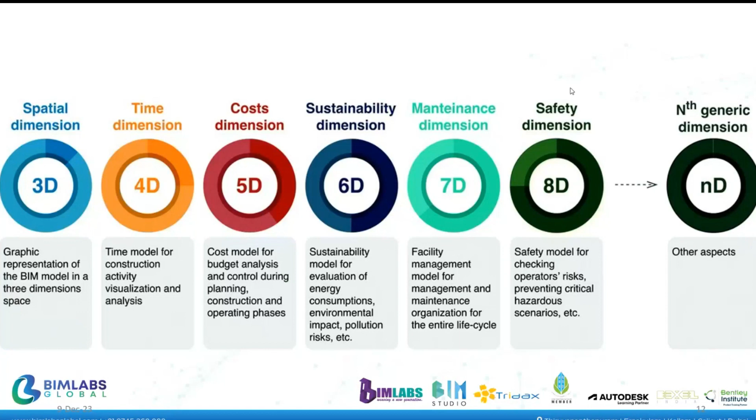For demolition also, the BIM is involved. So in each and every stage of this particular project cycle, BIM is involved.

This is like stakeholders involved in a project. When a project is started, different stakeholders or different people are involved. For example, design engineer organizations are there, involving architecture, structural, plumbing, electrical, and HVAC engineers. Owner organizations are there, involving owner, facility management, facility users, etc. Then contractors, subcontractors, and outside organizations like government agencies and financial bodies, for getting approval from the government we need that. Different stakeholders are involved in a project.

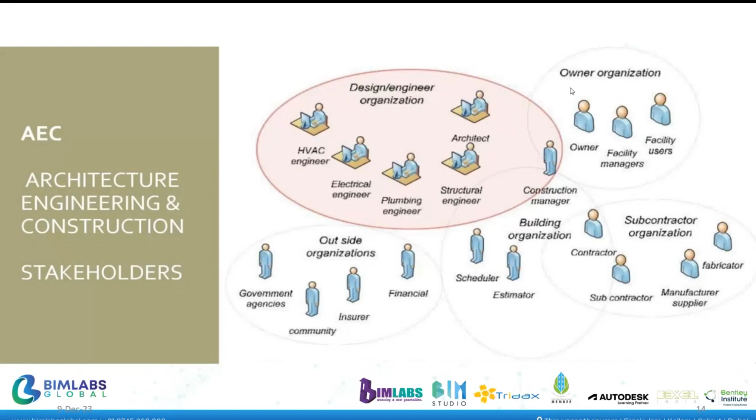The benefits of it: time saving. Time saving means before the real construction work starts, we do the modeling part, we do the analysis, we make sure that there is no error or mistakes happening in the construction work. Then error reduction, same, we make sure that there is no error.

Integration with other aspects: even if there is some error happening at the site when construction is ongoing, using the CDE which I mentioned earlier, we can report that problem to the person who is responsible or who is sitting in the office, and an advanced solution can be provided. That's error reduction and integration with other design aspects.

Creative or innovative ideas can be regulated and we can do the design, with BIM collaboration in construction. So these are the benefits of BIM.

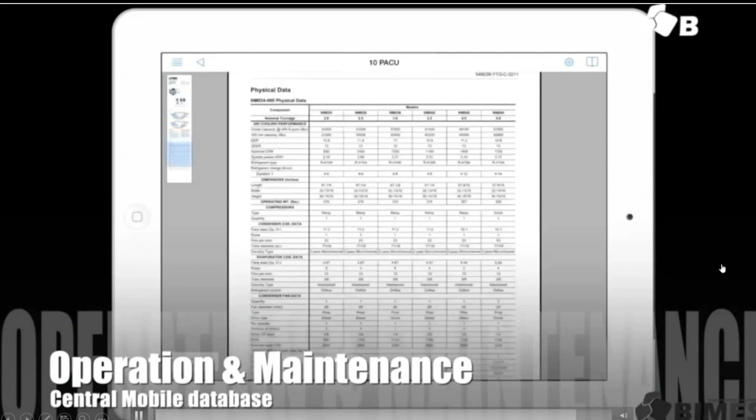This video shows on each stage of the project how BIM is involved. Hope you got an idea on that. Now I'll explain on each stage what is the procedure and what are the software or BIM tools which you are using.

Conceptual design has the initial concept of the building. For that, there is conceptual design, conceptual energy analysis, massing studies for programming, etc.

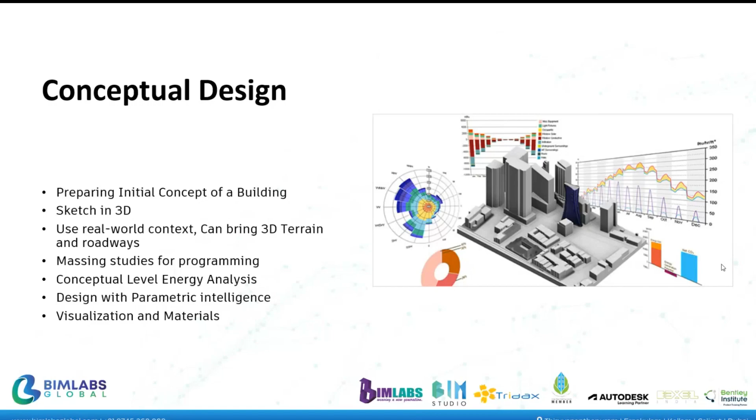These are the tools used in the conceptual design stage: Autodesk Formit, Trimble SketchUp, BricsCAD. Using these tools, we prepare the conceptual design. Conceptual design means not much detailing or dimensioning, just how the design is looking according to the requirement of the client.

Then we go for the programming stage. We have visual programming, where using the software we do visual programming and generative design, meaning we create a model. We iterate it with different materials and properties, using software that will analyze each model with different materials and properties and check for energy efficiency.

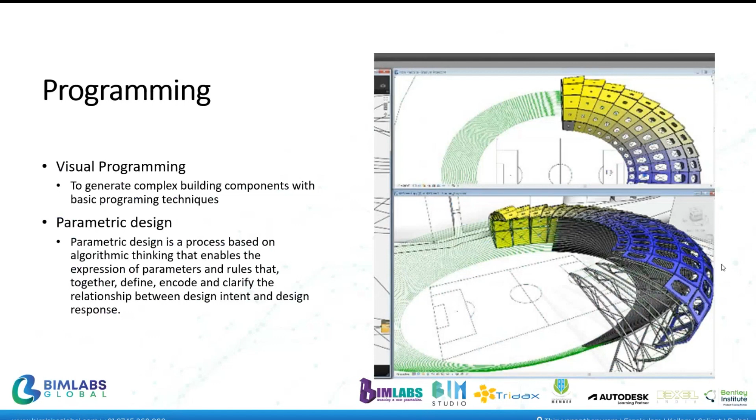Whichever model, with whichever materials and properties, makes the design or model more efficient, we choose that particular design. That is programming: a model is built, and we give different materials and properties for each iteration, analyzing each model for energy efficiency.

For that we are using these softwares: Grasshopper 3D, Autodesk Dynamo, Bentley Generative Components, Modelur SketchUp plugins, Vectorworks, etc.

Then detail design. Once the client has approved a particular conceptual design, we go for the detail design, meaning incorporating all the information into each element. For example, for a wall we give all the dimensions, materials, everything. For an asset like furniture, we give where it was purchased, the cost, the warranty - all the details for all elements.

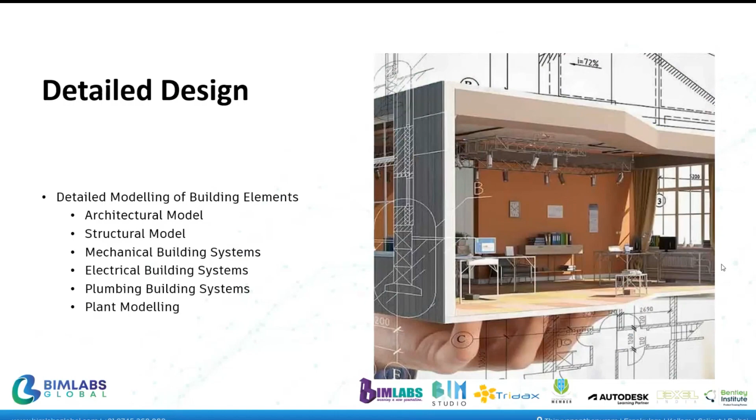Detailed designing is done for the architecture model, structure model, MEP, and plant modeling. Architects do the architecture modeling using it as a reference, structure people do the structure modeling, then MEP, and so on. Within architecture modeling itself we have different components like space planning, estimation, and interior designing, each with different categories.

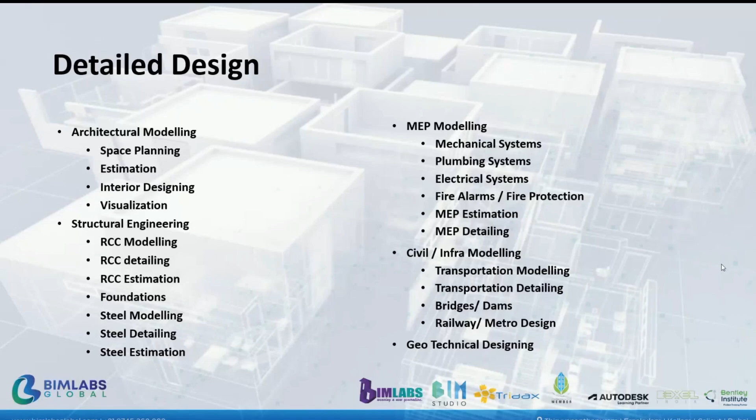For structure we have RCC modeling as one category, RCC detailing, estimation, etc. For each category we have subcategories, and the tools we use are Autodesk Revit, Graphisoft ArchiCAD, Bentley OpenBuildings, Vectorworks, Tekla Structures, etc. These are some of the tools used for the detailed designing stage.

Then analysis. Architecture modeling is done by architects, structure modeling by structure people, and MEP separately. Then we bring everything together and do the analysis part - structure analysis - checking if there are any collisions when everything is coordinated together. We do this analysis before the real construction work starts. That is building analysis.

We do analysis for structure, energy analysis, lighting analysis, and also for sustainability matters - like incorporating more natural light than artificial light. For that, lighting analysis, solar analysis, coordination checking, etc.

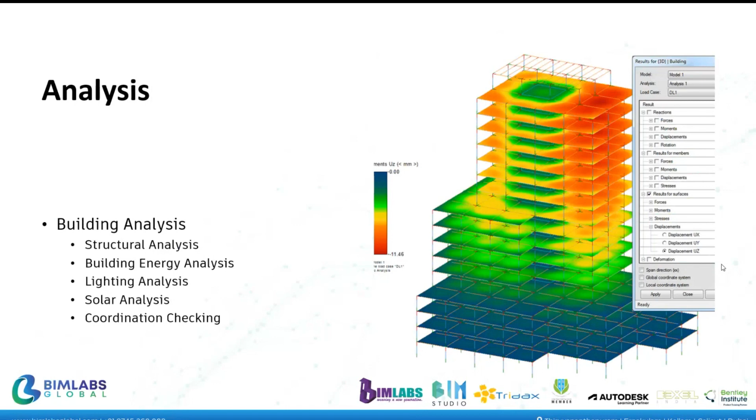These are the tools we use for structure analysis: Bentley STAAD Pro, ETABS, SAFE, SAP, ANSYS, Civil, PLAXIS, RISA, Vitas, etc. For energy analysis, these are the tools: Green Building Studio, Autodesk Insight, Designbuilder, OpenStudio, Virtual Environment, etc.

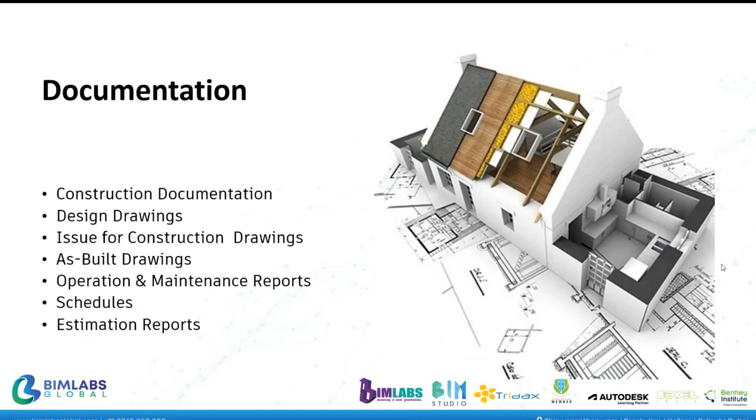Then we go for documentation. Once modeling is completed, we go for documentation, meaning extracting the deliverables. Construction documentation, design drawings will be there. If there is ongoing construction work and any clarification needed, we do issue-for-construction drawings. As-built drawings mean full complete LOD 500 drawings. Operational maintenance reports, schedules, and estimation reports are also prepared. These are the document categories coming under the documentation stage.

And it can be done by using these softwares: AutoCAD, Bentley MicroStation, ZWCAD, BricsCAD, etc. Then fabrication. Fabrication means if there are some scenarios where we can't do the work there, what we will do is prefabricate that particular model and then go and place it. That is fabrication. So these are the tools coming for this: structural fabrication, MEP fabrication, etc.

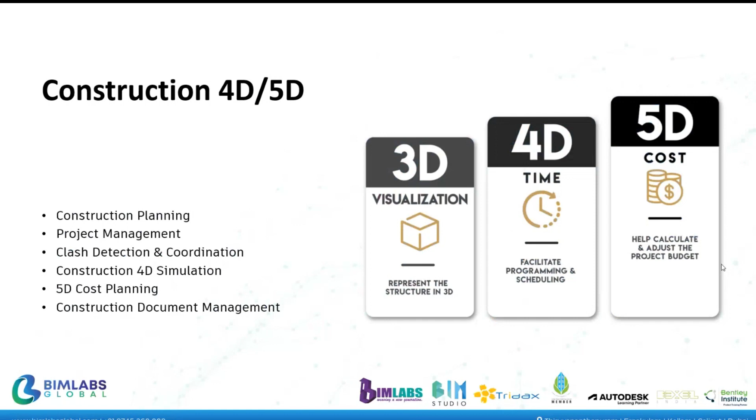Then incorporating time and cost: construction work, construction planning, project management, clash detection and coordination, construction 4D simulation - incorporating time with the construction process, that is 4D simulation, 5D cost planning, construction document management. These come under construction 4D and 5D, and these are the tools we use for this purpose: BIM 360, Vico Office, Navisworks Manage, Synchro, Bexel Manager, Solibri, Bentley ProjectWise, etc.

I'll just show a video on this.

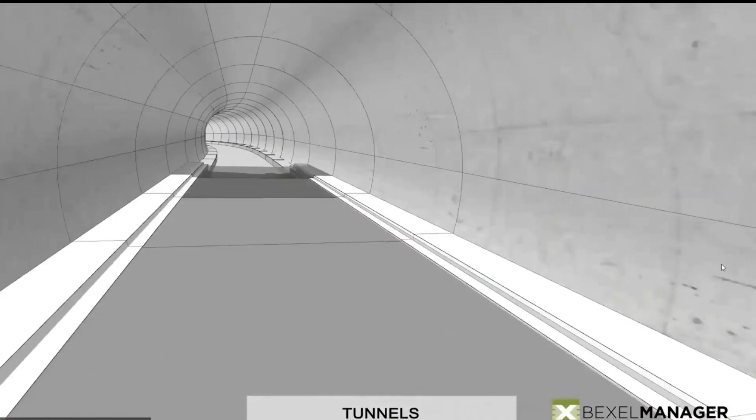So in that video you can see different structures like tunnels, railway lining, hospitals - different structures being built using BIM. And if you have seen that, it had incorporated the time on each day - what is going to be constructed on that particular day, what is the position of the construction on that particular day - that 4D simulation, everything can be incorporated using BIM.

Then construction logistics, construction field management, asset and facility management, commissioning and handover - that comes under this logistics part. Operation and maintenance - once a client starts using that particular structure, we go for facility management. Then the demolition cycle - so demolition also, how BIM is involved.

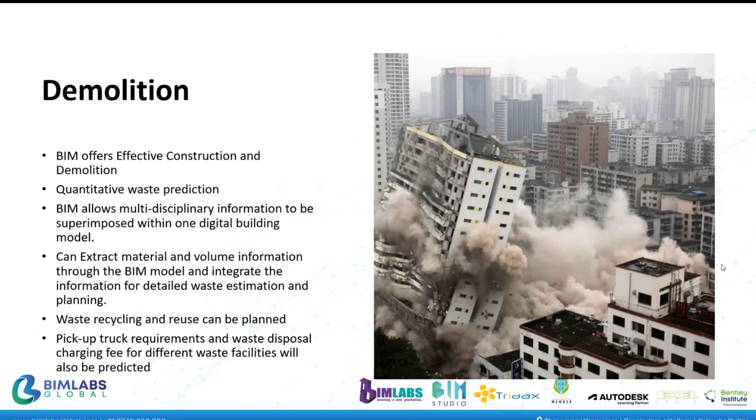So BIM offers effective construction. We can predict the waste quantity and waste pressure, and it allows multidisciplinary information to be superimposed within one digital building model. We can extract material and volume from the BIM model and integrate the information for detailed waste estimation, waste recycling and reuse. So for different purposes, BIM is involved, and it can be used for the demolition stage also.

I'll just show a video on that. This is a demolition that happened in Kochi, Kerala.

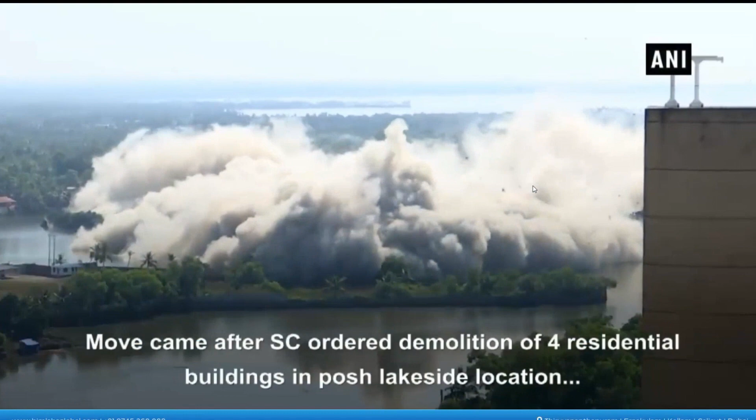Okay, that is all about the demolition stage. Now coming to renovation - how is BIM involved in the renovation stage?

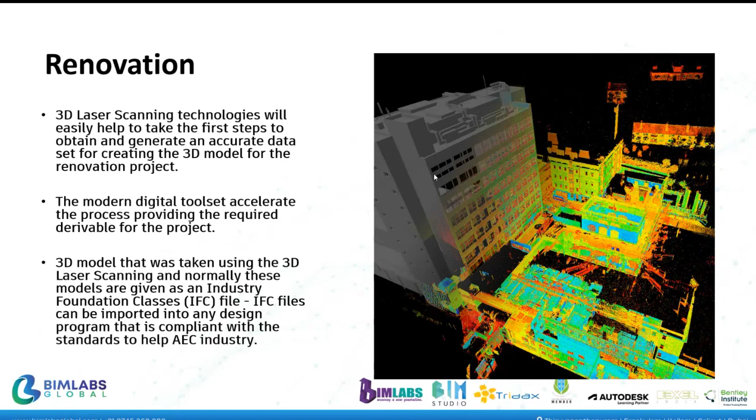For renovation, we use the scan to BIM technology. For example, if we have an old monument or old building with us and we need to renovate it, but we don't have any documents related to it, what we can do is recreate the documents. Using scan to BIM technology with laser technology, we take the point clouds and convert them into the software. Then we recreate the document - we create a document once again. Then we make the required changes in it and go for the renovation.

Just showing a video on what is scan to BIM technology.

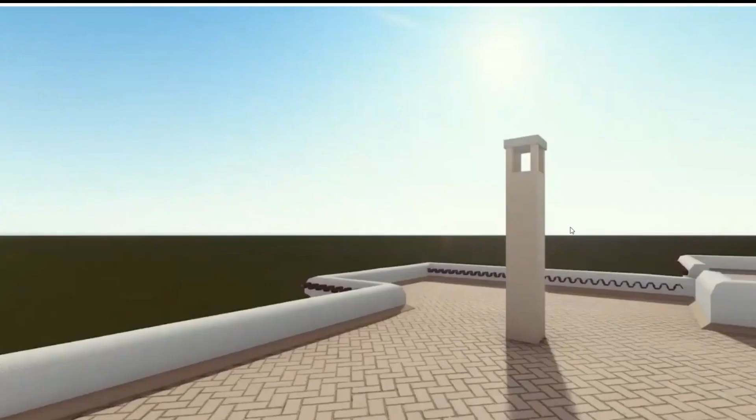Would like to learn more.

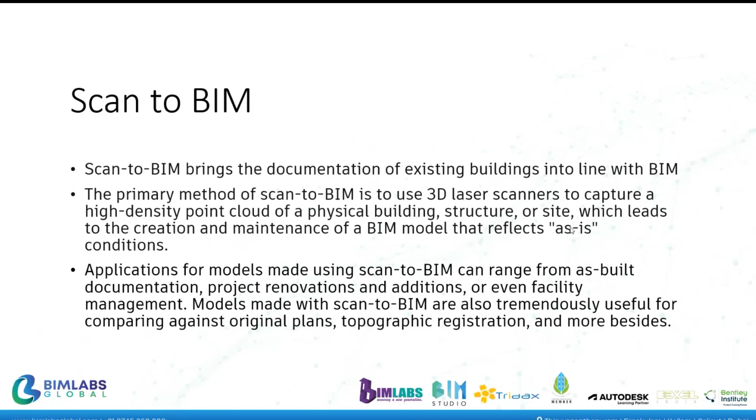Okay, so that's the video showing scan to BIM. So we can recreate the documents of an existing building and make changes in that particular model, and we can do the renovation. So those are the benefits of BIM for the renovation project.

We can have the ability to share data across applications. Then cost estimation - we can achieve accuracy using it, up to 3%. Clash detections we can do, reduction in project delivery time, etc. So these are the benefits of BIM for renovation purposes.

Now, BEP. So till now I've briefed you on the different stages of construction, how BIM is involved, how the output of BIM is like a zero-error and intelligent model. Hope you got an idea on that. Now we go for another technical standard, that is BIM Execution Plan.

As already said, the output is like a zero-error intelligent model. So in order to implement a project in such a way, we need a plan. If we want a project to be in an effective manner or with zero error, we need to plan our project accordingly. For that we have to create a BEP for each project. When you get a big project or a project working in BIM, we have to create a BEP, BIM Execution Plan - on each stage, how this project is going to be implemented. All the details should be there in this particular plan.

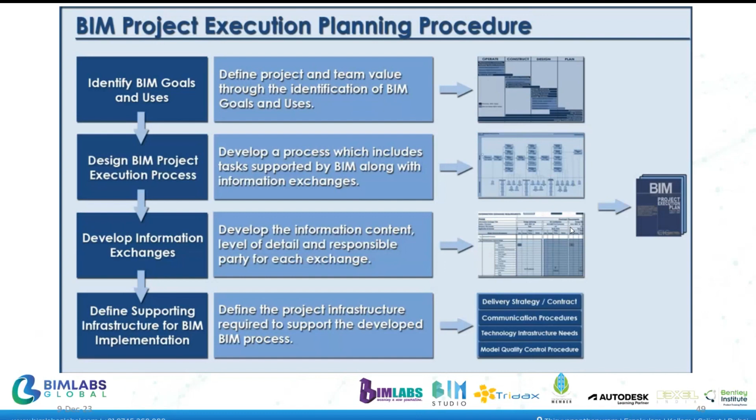So BEP is a framework to ensure successful deployment of design technology on a BIM-enabled project. These are the planning procedures: we have to identify the BIM goals and uses, design the project execution process, develop information exchange, and define supporting infrastructure.

Just showing a video on this.

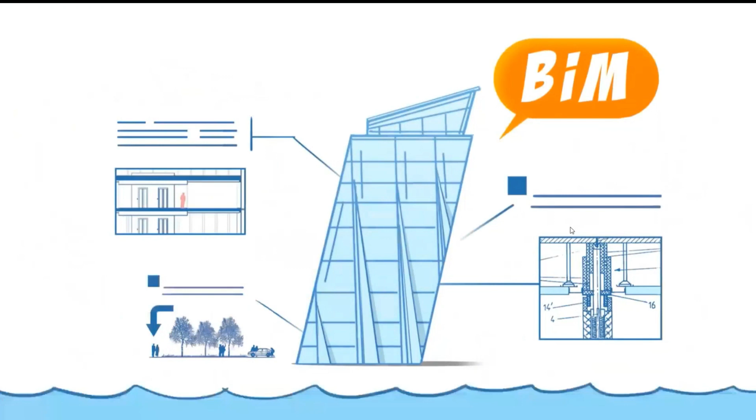By always serving their projects with the latest technologies, today's new thing is the BIM revolution - a collaborative process applying to any kind of project, from more standardized ones to the most complex and unique ones. Who said magic? Well, before implementation, you need to properly identify the needs of every trade involved and select the project's use cases that are key to the project. The BIM manager guides the process for the team. Each project has a unique context and set of requirements.

Construction method and planning. Construction site.

The customer's wishes and regulations are harmonized by the BIM manager in order to integrate them into the BIM execution plan, the project's guideline. For example, to satisfy the client's requirements on deadlines, the BIM manager identifies 4D as a crucial use case for the project and describes in the BIM execution plan each party's role and the data each one has to deliver in order to implement the timeline of the project within the BIM model. A well-prepared BIM is an easy BIM.

Okay, so I'll just show you a sample for BEP. So for implementing a BIM project, the BEP is an important one. We need to create a BEP for this project, and it will contain all the details of that particular project.

So this is a sample BEP which we have created. BIM Labs has created this for the last World Skills, for training the contestants for the last World Skills, which was held in Shanghai 2022. This is a BEP created by BIM Labs Global. I'll just show a sample of this. It will contain the project documents, all the documents related to it.

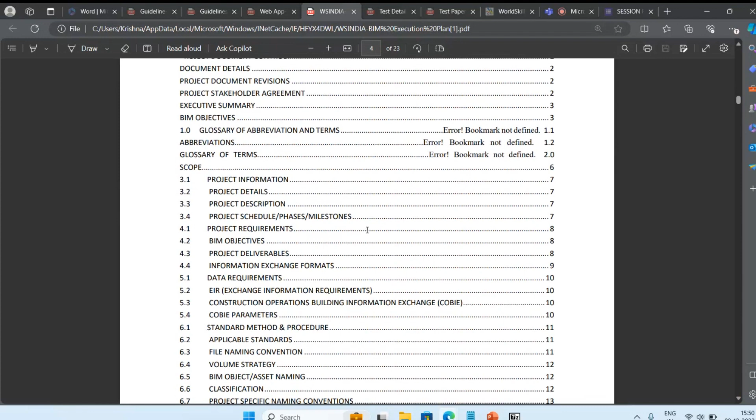This is the content: documents, details, stakeholder agreement, scope, project information, project detail, description. So all the things related to the project, how we have to implement that particular project - it's like 23 pages.

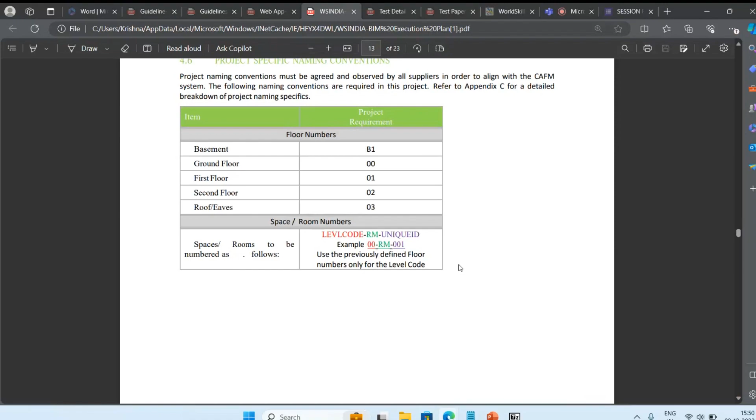So it's important that when you get a BEP of a project, you need to understand how to study it or how to read this particular BEP. This is also important. So if you're working in a BIM project, BEP reading as well as creating your own BEP is also important. That is a sample of BEP.

Now I'll just come to BIM projects. I'll just show you some sample BIM projects. So this is Dubai Expo 2020.

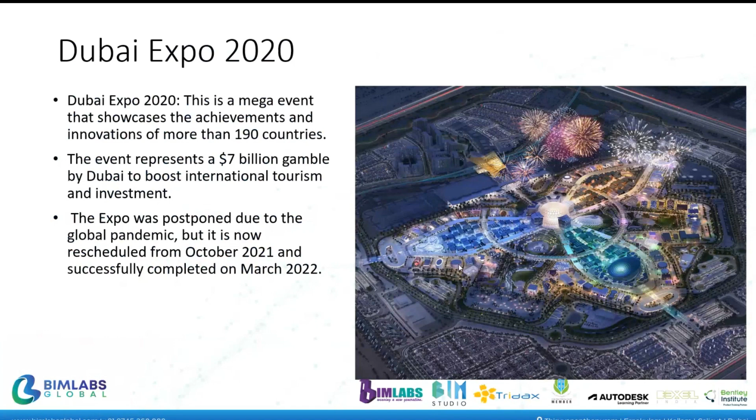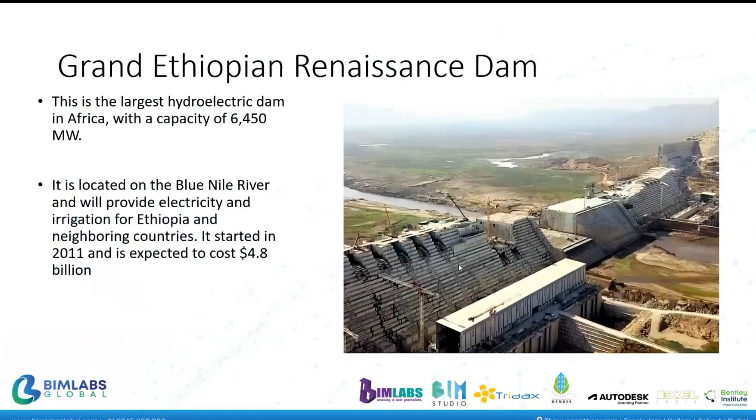Then there was Sheikh Jaber Al-Ahmad Al-Sabah Causeway, Burj Khalifa, Palm Jumeirah, Grand Ethiopian Renaissance Dam - more. I just listed some of these structures as BIM projects, just showing samples of some BIM projects.

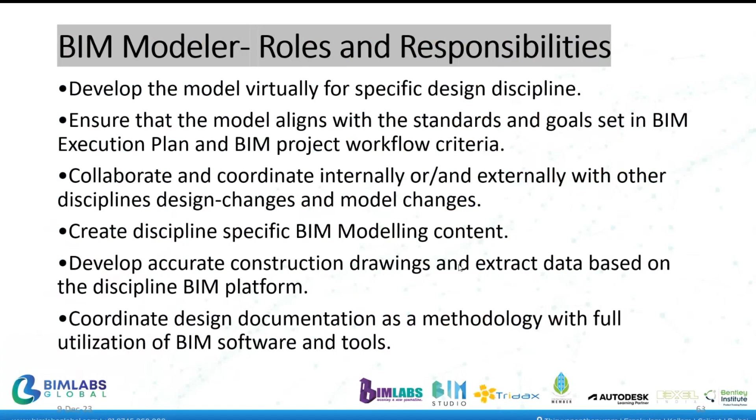So these are the roles and responsibilities for each one. For the BIM modeler, you have to create the model following all the standards and guidelines. Then the BIM coordinator - once the BIM modeler completes the model, the BIM coordinator will check whether there are any clashes. They coordinate and review each model, checking for clashes or collisions - that is the BIM coordinator's role. The BIM manager is the person responsible for the preparation of the BEP and so on.

Now, as a fresher, in order to get placed as a BIM modeler, you have to know the companies that are recruiting, understand the job role, and know what projects that company is doing. You have to understand the job roles of that particular company, learn the process, practice the process, complete the test project, familiarize yourself with different projects, prepare for the interview, meet the employer, showcase your skill, and onboard into the career. So these are the steps to become a BIM modeler.

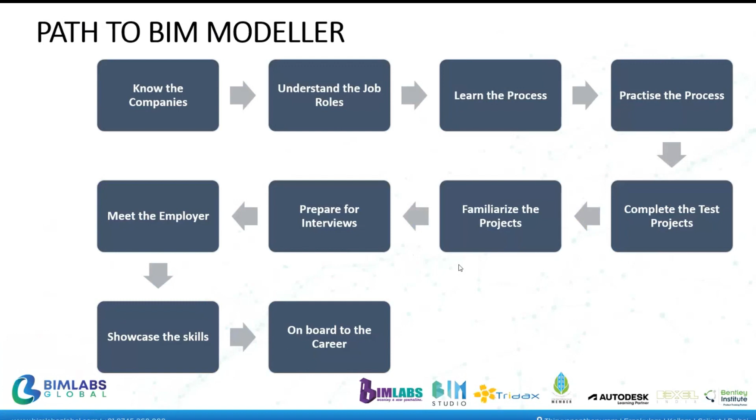So this is a brief on what BIM is, what stages are involved in a project, and how BIM is involved in those stages.

Just showing some VP samples, some BIM samples of BIM projects and everything, in order to get an idea of what is digital construction and what is BIM.